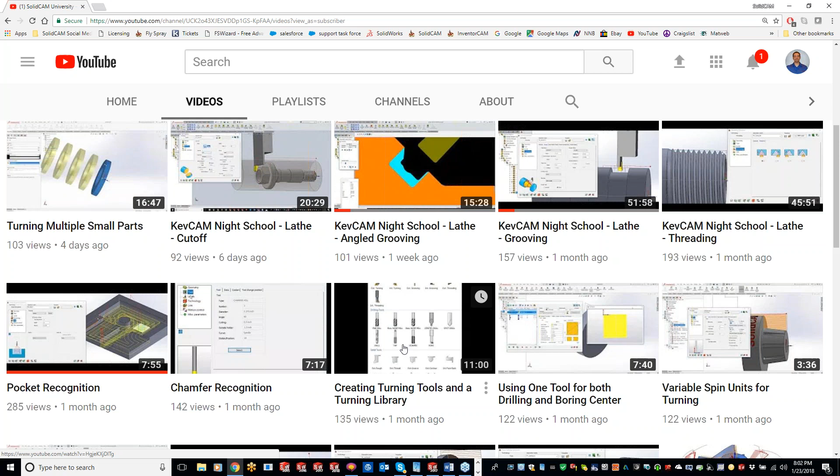Steve's great at that. He's like, hey, do we have a video on this? Yeah, go do a search and we'll find it for him. But 99 times out of 100, Kev, there's already some content built. So definitely feel free to shoot those over to me in an email, and I can find those for you too.

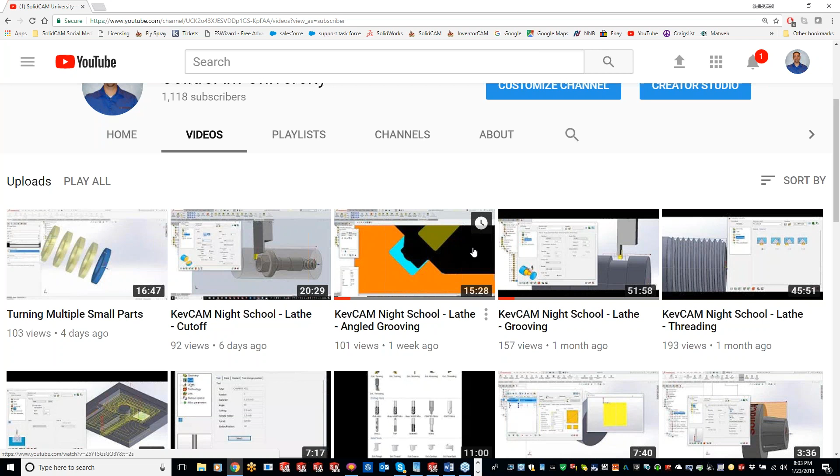That kind of wraps that up. So tonight we are covering manual turning. It's going to be a pretty short class, like we've been doing the last couple of weeks, just because there's not a whole lot of excitement in there. But like I said, tonight we're going to be covering manual turning.

Manual turning is pretty much exactly what it sounds like. There's no technology, there's no wall offset finishing, nothing like that. Manual turning was actually introduced for custom tools, getting a custom tool to fit in a specific location. With the turning parameters and updated stock that's constantly updating for you guys, sometimes we just don't get that path that we're looking for.

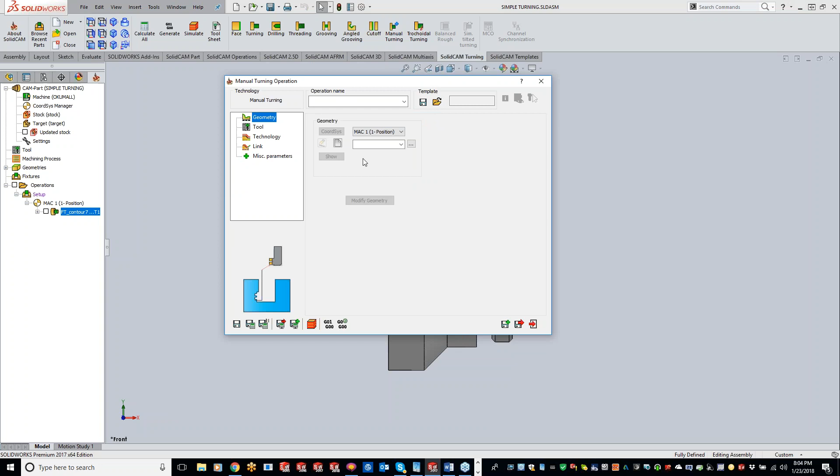One good way of looking at it is, for the milling guys in here too, when you just draw a 2D sketch and use that for your profile, that's pretty much what we're doing here. We can use sketches like I'll do right here, grab geometry off of there and do whatever we want, and it's going to cut exactly that path for us. So let me open up manual turning here. Same as normal, we've got our geometry page. For this one, I'll go ahead and grab our geometry real quick.

So I drew some—or I shouldn't say I did, Mark Pimentel, our training manager, actually had him come up with a couple parts and did a great job. We're kind of talking about this, and for some of you guys, this came up: if you're running a case hardened part, like a Thomson shaft, where you've got that first layer that's super hard but anything below that you can take larger cuts, this would be a good time to do that. You could throw a bunch of lines in right up here, and as you get closer to the center you can space those out because the material becomes softer.

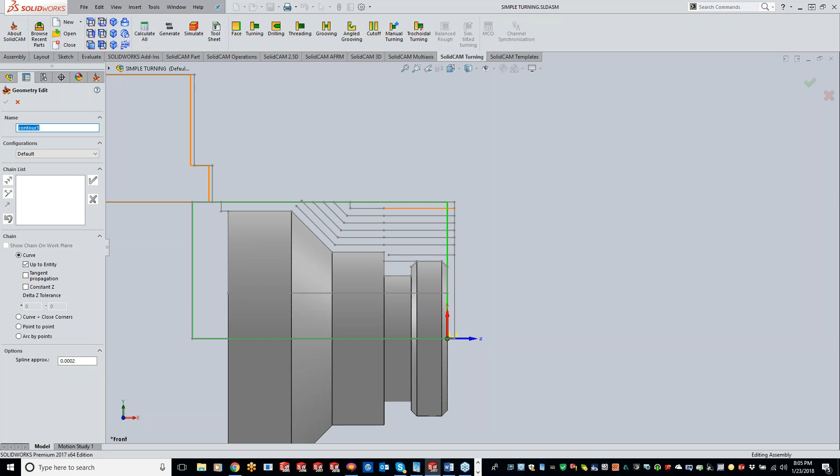Like I said, real simplified, easy to use, and very, very basic. So for our first one here, I'll just chain up what we're looking for. I'll grab that chain here.

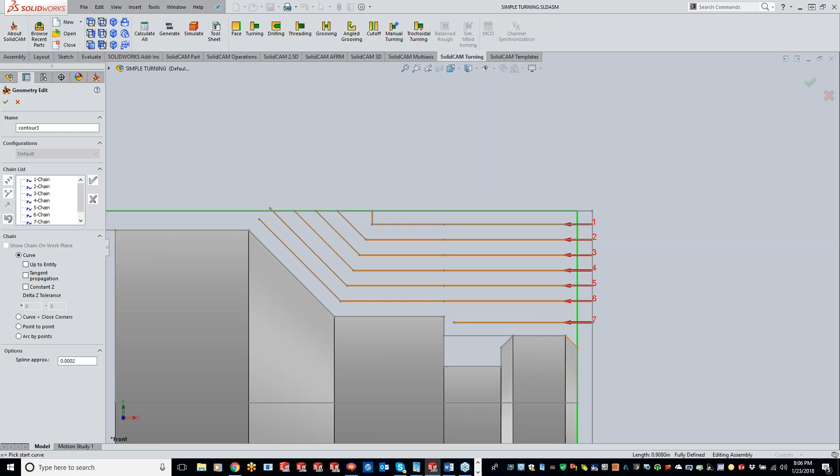All right, so we kind of got the roughing there, and go a little bit deeper in here. Now what I'm gonna do is I want to finish it off. So come here, come here. Oop, let me undo that last one and grab that one. I've got sketches on top of sketches here, so I'll have to use select other to get that small little gap in there. Grab this line, kind of go up, over.

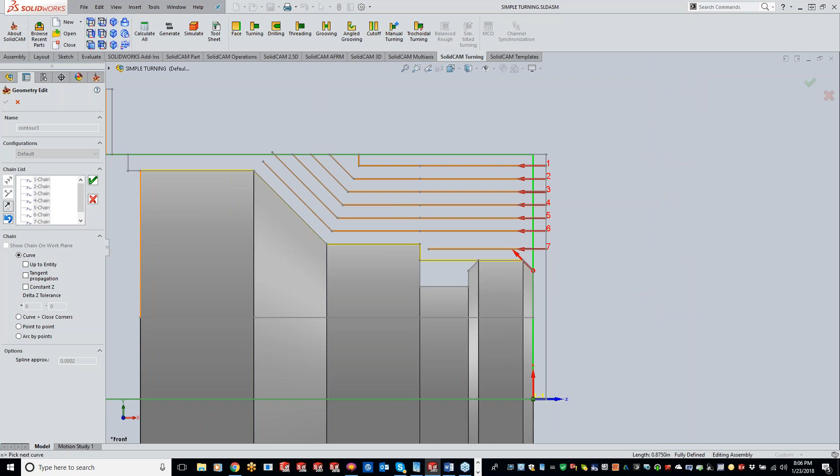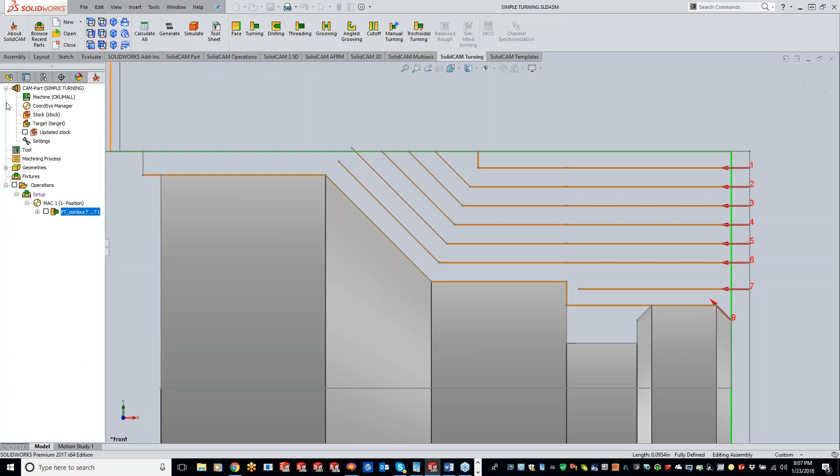Hey Kev, quick question. When would you go to manual turning versus just the straight lathe programming? Or is there any generalities to that?

There is. When you guys are doing a straight turning, like this one up here, you have the ability—so the roughing is only based off of the updated stock. Let's say you want to go, just kind of keep going past, and you want the roughing pass to go a little bit farther past, or a lot farther past. You can manually do a manual turn and grab those lines and go way past, even though you may be cutting air or just doing a skim cut. That's one example, kind of like what we're doing right here.

If we're doing multiple, in regular turning I can't take this geometry right here and do closer lines up here and then fan out the lines as I get deeper into the material. It's more control, Kevin—yeah, it's more control, but you have to give it that control. So you have to kind of put... I don't want to say it this way, but you have to put the work into it to get exactly what you want.

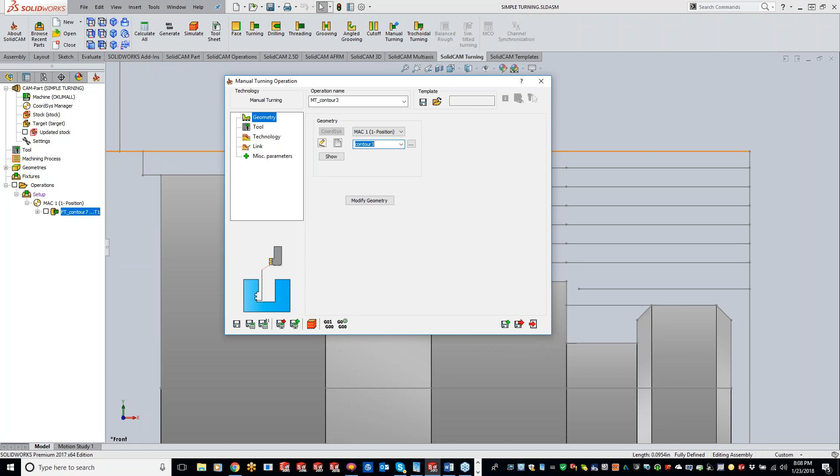And pretty simple to do too. When Mark drew these lines right here, he just went off of the target sketch, right clicked and did edit sketch, and then added these sketch lines in there. So cool, thanks, perfect. And I can take a peek at my modified geometry here, but not really much I need to worry about because I'm manually just going up and around, so we should be good.

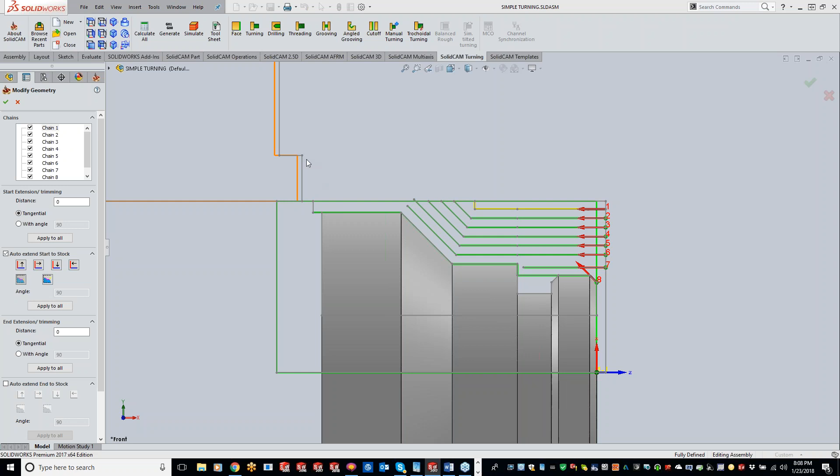Tool—I'll just go ahead and grab a standard tool here.

Now sit back in your chair, there's not a whole lot in the technology. Like I said, just manual turning—it's as basic as it goes. All you really have right here is just reversing the cut direction. You don't have wall offsets, you don't have follow ISO lines. Doing all that is basically what you've done in the sketching here. And then same thing with the link, just where do you want your approach—from the right safety corner—or we have all the other options down here for you guys that we've covered in the past.

So let's do save and calculate here. Okay, so we got our part here, and it shows us our cut lines, and it's just following those exact cut lines that we specified.

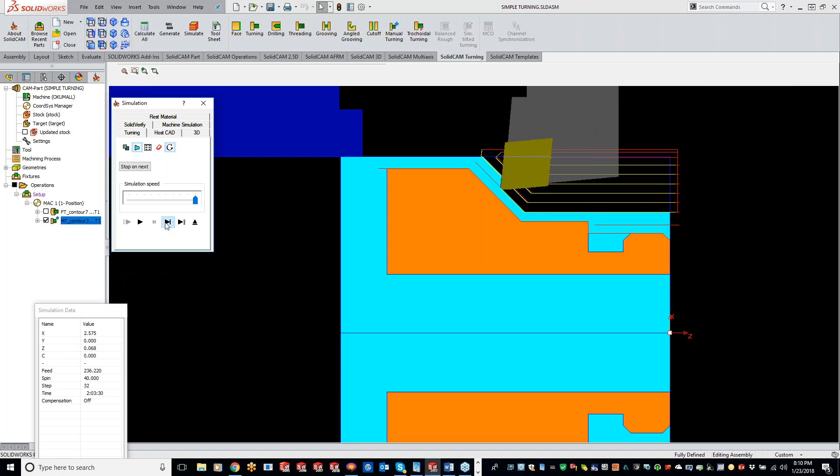Same philosophy as SolidCAM always has. We can help you along, or you can take as much control over the tool path as you want. Correct, Kevin? Yep, absolutely. Cool. And there we go. I mean, it's as basic as it gets right there.

And like I said, I like manual turning because I think as machinists, we're all anal, I guess you could say. We want to see certain things done a certain way. This way, I can draw in a specific sketch for the turning to follow that specific sketch.

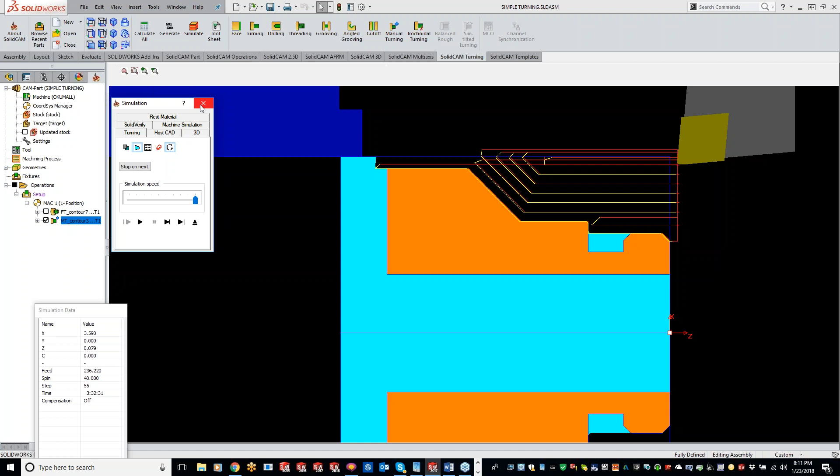So that's one part I really like about it. Like Steve said, we have the automatic stuff, but if you want to do it your way, and you know that way is going to work because you've done it before, no problem at all, because we can add that in there for you. So, any questions on this part?

Nothing so far, Kevin. George just mentioned, and I think it was a pretty accurate statement, it's kind of like lathe engraving. Yeah, absolutely. Just grabbing that 2D sketch and going to town. Yep, exactly. Great analogy. Okay, so that is manual turn on that one.

Let me close out. Kev, quick question. Yep. Can you use cutter comp? Matthew asked. No, there is no cutter comp. Let me bring that part back up here. Great question too, Matthew. Thank you. Yep, there is no cutter comp that you can turn on. You could add it in the G code, but like I said, the manual turn was developed for shape tools.

And with shape tools, cutter comp can get a little tricky just because of the different shapes that are out there and all the different grooving tools and all that stuff. So this is as basic as basic gets right here, Matt. So to answer your question, no, there is no cutter comp.

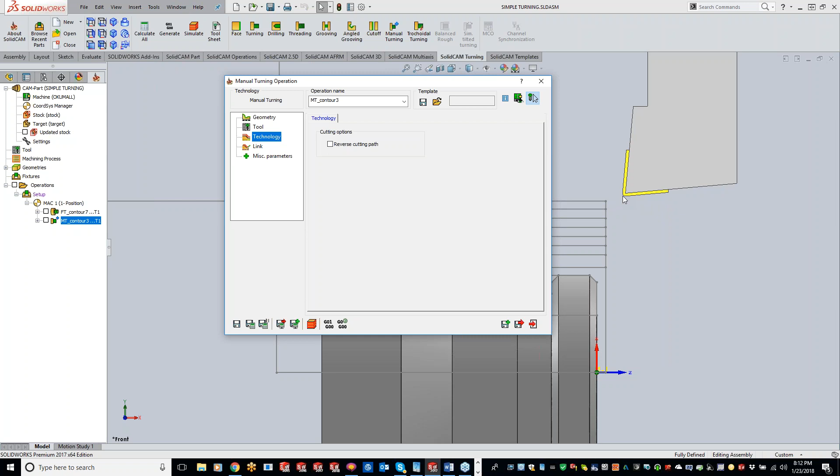But we can add that in on the G code, or like I said, we can use this as a roughing strategy and grab this line, this one, this one, this one, do that as the manual turn, and then come back for the finishing pass where comp is really crucial for us, and just do one finish turning pass along this entire area. Great question though. Forgot about cutter comp on that one.

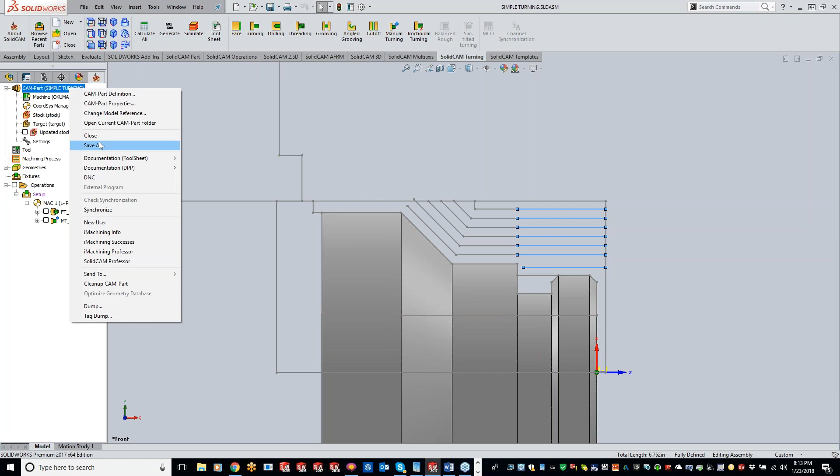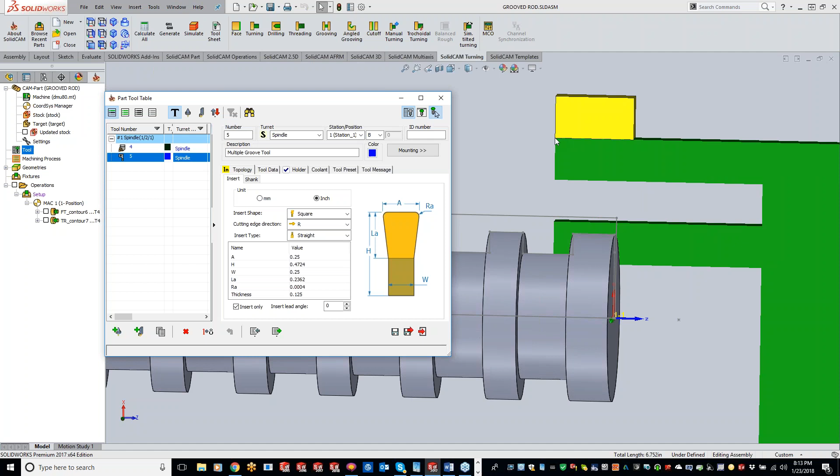All right, Kev, another quick question. Can you add odd tools, like turn with a grooving tool? Okay, yep. He's got something. This odd tool right here? Hopefully that's what we're getting at, the funky looking tools, misshapen ones. Yes.

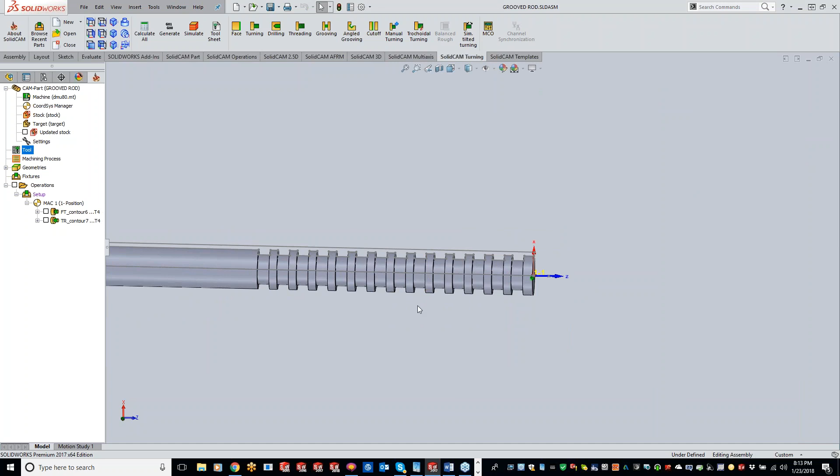Absolutely. So with that tool, the intent was, and Mark did a great job doing this one, a groove tool, but it's a double groover. This is definitely a custom tool. I could not do this with a regular grooving operation because we have two inserts going right here, and I don't want to do every single one because I would be double cutting. So I'm going to have to skip over.

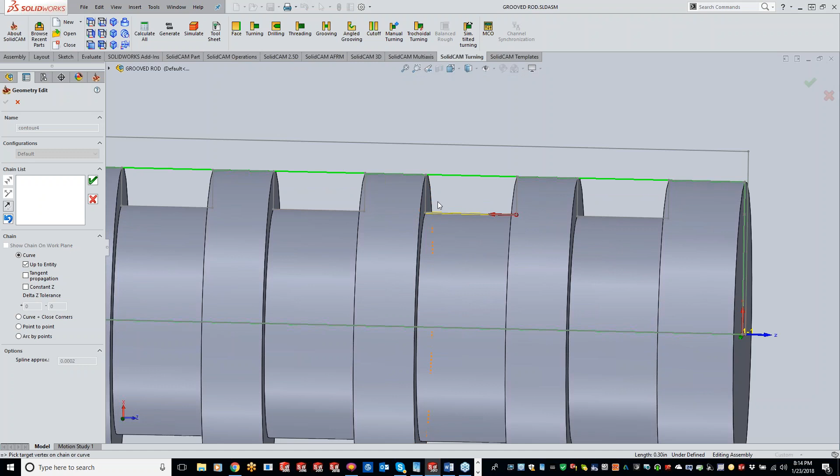So let's just dive in here. Okay, so chain. Come on. Hit the green checkbox. I'm going to do every other one here. Dang, I forgot to hit the green check mark. There we go.

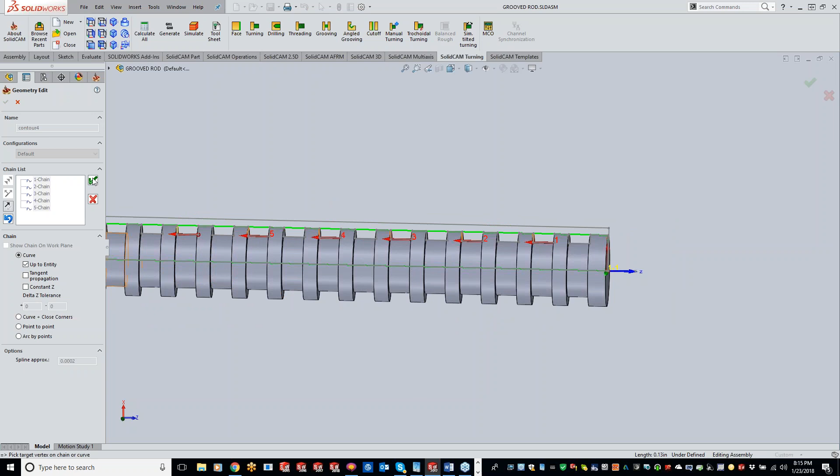Okay, so I got my chains that I want to do. Like I said, those are going to go in the exact order you pick those chains. So it's going to start on the right side and work its way to the left. Now, you'll see right here, the gap between these slots is 300 thou wide. Okay. Let me select my tool here.

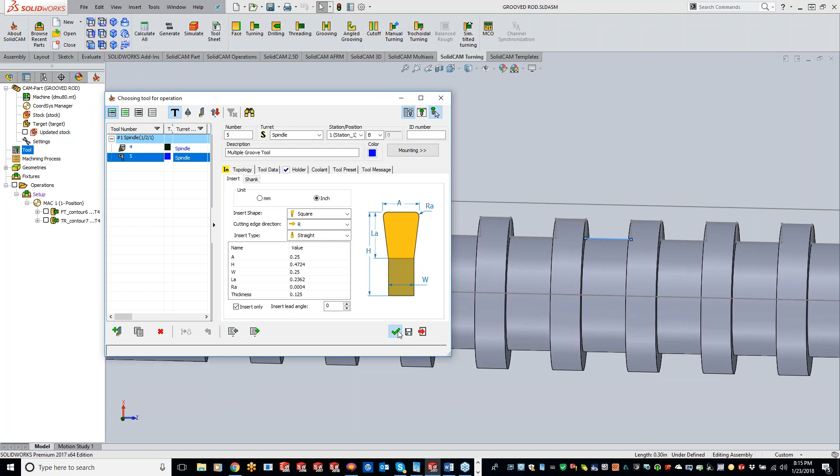And I need to flip this guy, and my tool still looks a little funky here. There we go. Okay, so you can see my tool. I have an insert on the left side, and I have an insert on the right side. So like I said, I want it to come in here, move over, come out. Skip one, come over, move over, and come out.

So I have a 300 thou wide slot right here. My tool is 250 thou wide. So I need to shorten up my start point, because if I start all the way over here, move over and then come up, I'm wiping out that previous outside diameter. I keep looking at this and thinking of a camshaft on a motor, but this lobe right here.

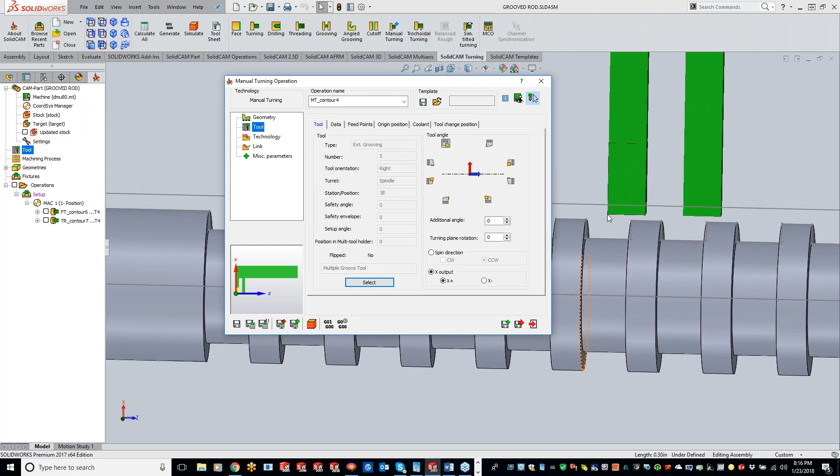So what I want to do is kind of shorten that up by the width of my tool. So if I go to my geometry, and I want to do a minus 250 thou, I'm going to apply that to all my chains. And this one, I need to turn off the auto extension for each one of my chains here.

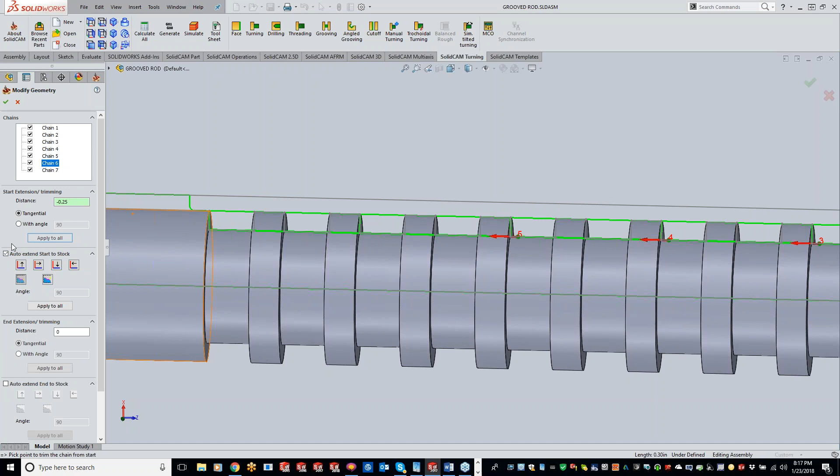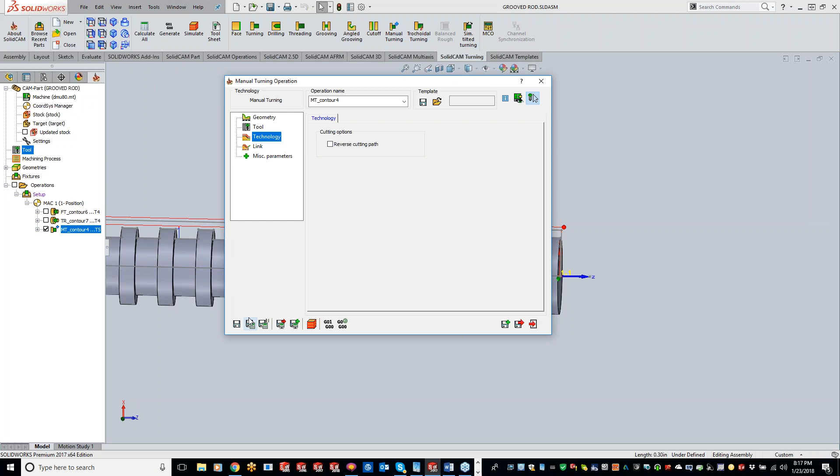Okay, so I got chain 1 through 7 here, and you'll see that I shortened it up by that 250 thou to compensate for that custom grooving tool. Technology, nothing there. So let's just do save and calculate. And let's do simulate here. Come in, groove out, looks good. So I'm getting a little bit of a retract back to the original position right here.

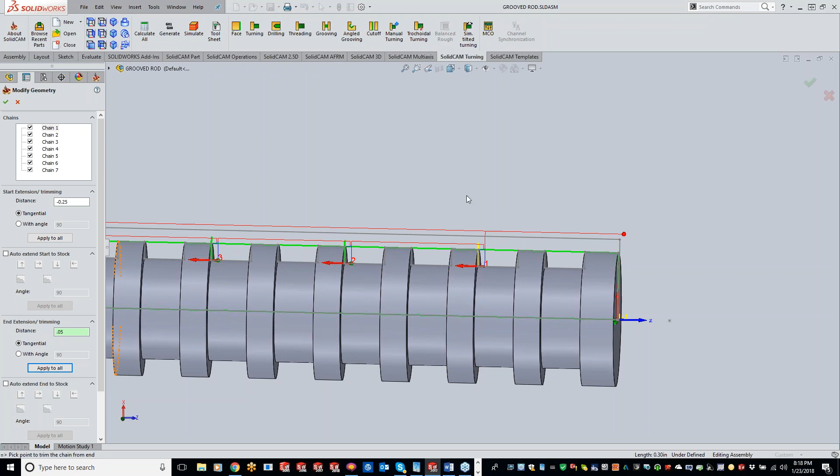Let's say I want to go farther out. I don't want to come in here and extend my sketch. Easy enough. I can come over to my geometry, click the modify geometry button here, and if I put a 50 thou extension, so it's coming up far enough, or maybe 100 thou would be better. Apply to all. Can't get this out of the way here. So now we're coming in straight out.

So this is really what the module was built for, doing custom tools and stuff like that. Tried to find some different shapes, but I couldn't think of any, so I kind of let Mark dream up something here. But we got like a fork tool here, and we could do all grooves all in one pass here. But we can also use it to manipulate other things too.

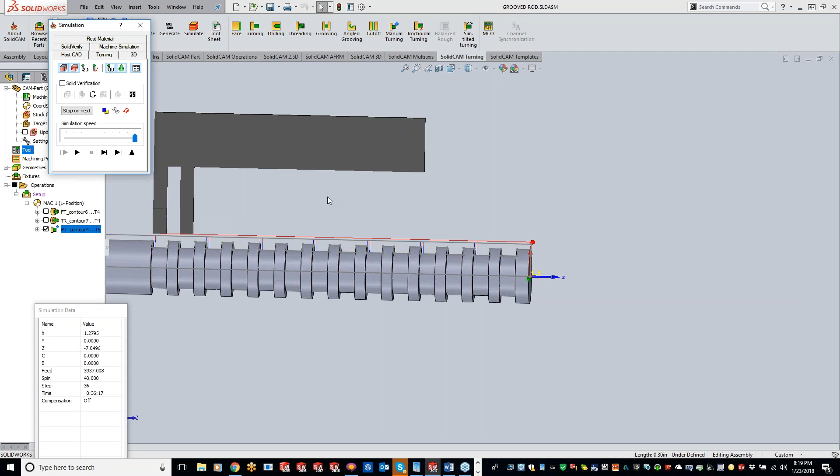So like I was saying before, if we do a turning here, and under technology I just want to do a rough only, I don't have the option to do the entire geometry like I do with the finish for rest material or entire geometry here. So with the roughing strategies, I can extend it off more and go into different custom directions versus going just off of a smooth pass, stepping down X amount.

This is definitely much easier to do, but if you're looking for that exact tool path of, I want it to do exactly what I want to draw with my pencil, that's not a problem. We just have to draw that 2D sketch in there. And Kevin, if you had a funky tool like that, it'd just be a matter of getting the model from the tool provider, or just putting it together in SolidWorks and then putting it in your tool library, correct?

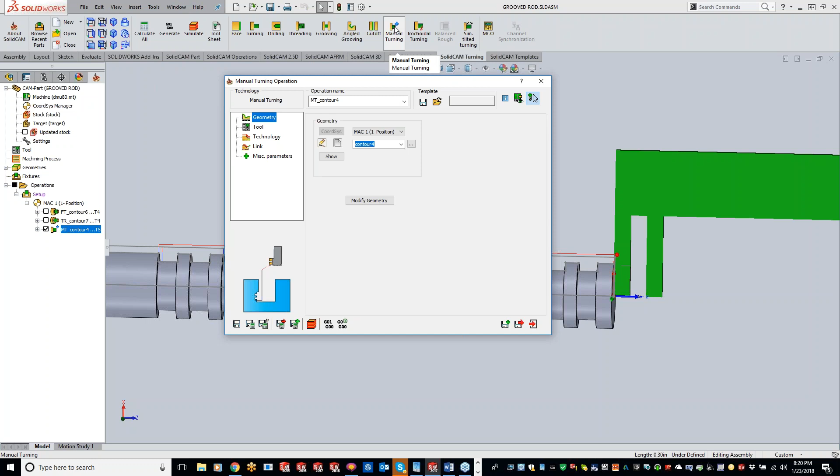Yep. Absolutely. So, funky tools. Right. That's why I think their little icon, let me see if I can. So they got somewhat of a grooving tool right here. But you kind of see up here the little blue insert, I guess you could say. Looks like a first aid star or a cross.

Like I said, it's more driven for the custom tools, but there are plenty of scenarios where manual turning is exactly what you're trying to achieve to get that ideal tool path you're looking for. So when you guys are doing those harder parts, we can have those lines spaced really close apart and then slowly start fanning out, where we can't do that inside of turning.

So we don't have the option in our technology here; we're only able to do 40 thou step down, where I don't have the option to say, for the first pass I want to take lesser amounts, and for the passes deeper into the material I want to take more hogging. So does that make sense to everybody? If I'm not confusing you guys.

Kevin, if I can understand it, I'm hoping the group can.

Matthew gave you a thumbs up?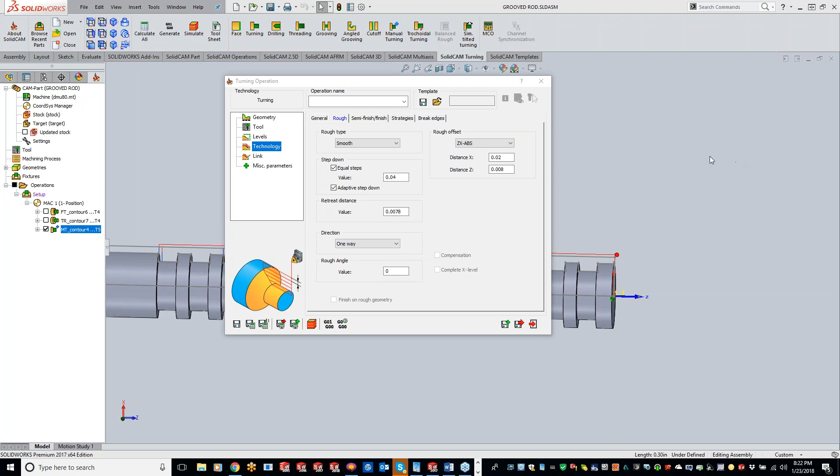Perfect. Okay. Kevin, manual turning comes in the standard lathe package, right? Yep. Absolutely. Cool. So you guys, for the standard lathe package, you're going to get all of this right here. So you're going to get trochoidal turning, manual turning, and I'm excited to show you guys the trochoidal. I'll get into something a little bit cooler here. But manual turning, cutoff, angle groove, grooving, threading, drilling, turning, and facing.

I don't know on the simultaneous tilted if that comes with standard grooving, or I'm sorry, standard turning or not. I'll have to look into that one. But once we get up to this one right here, I'll fill you in on it. So perfect. But any other questions, guys?

A little bit of a quiet group tonight, Kevin. Yeah, these shorter turning ones, I know they're a little boring, but hopefully you get something out of it, and they're a little shorter than normal. But we'll be getting into some definitely more advanced stuff, and more gray hairs on my head coming out soon too, because when we get into the mill turn side of things, depending on post processor and stuff, I want to try to get you guys to know as much as possible.

So, but I don't see anything else coming up. I can't think of anything else to cover in that turning. Different strategies, but I had one customer part file, and I never heard back if I could use it, so I couldn't. I was hoping to show that for you guys, but yeah, that's pretty much all I got. So, beautiful. I don't see anything else coming in. So, all right, guys, like I said, short, simple, easy turning strategy here.

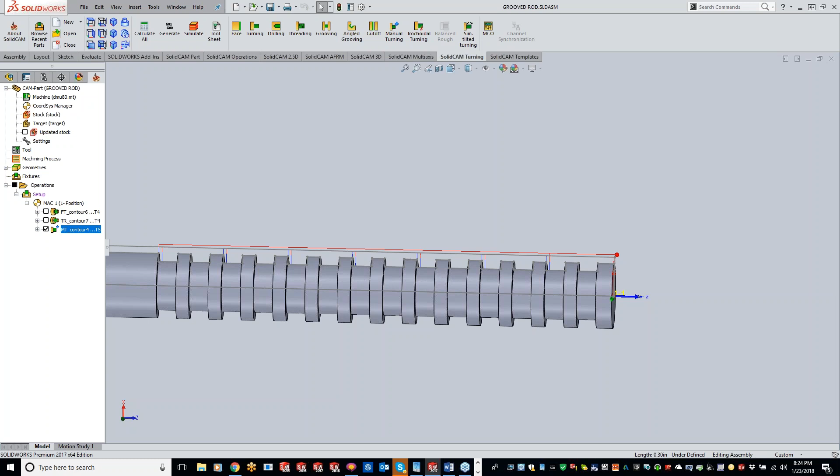Something I haven't brought up for a while, and thanks, Ron, or Ronnie, you came in as Ron. Threw you for a loop, did it? Yeah, threw me for a loop there. But let me, I got to find it here. Let me crank this over.